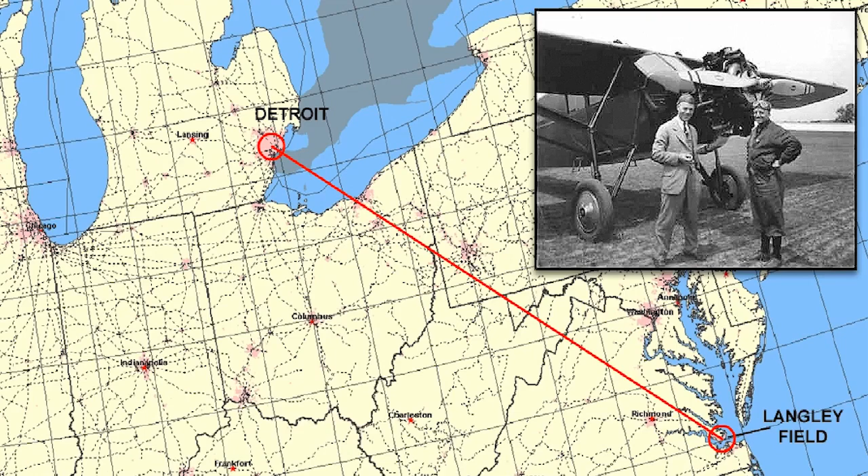The aircraft accomplished the trip at an average speed of 85 miles an hour through adverse weather. The straight line distance is 560 miles, but this aircraft, in fighting its way around and through extremely bad weather, travelled approximately 650 miles.

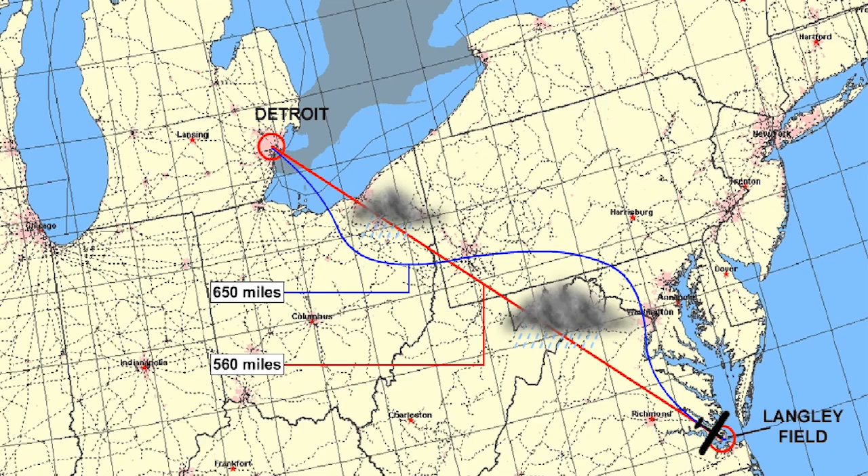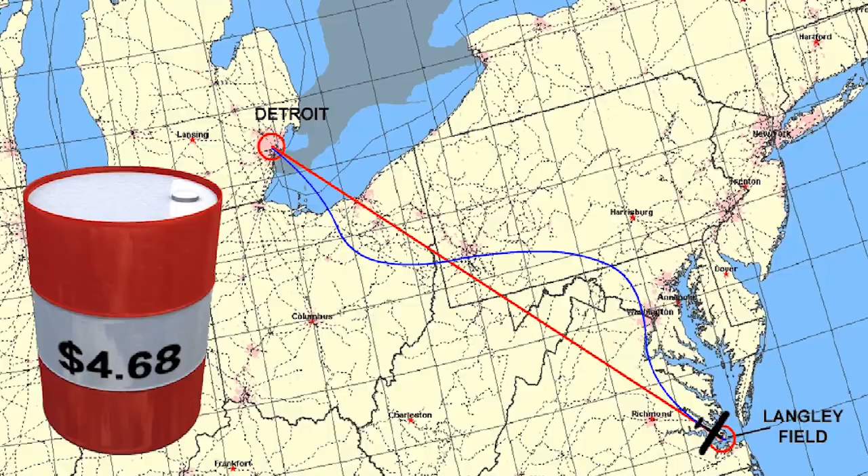The cost of the fuel for the flight in 1929 terms was $4.68. Automotive diesel engines in the past were less powerful than gasoline-fueled aircraft engines, and unfortunately much heavier.

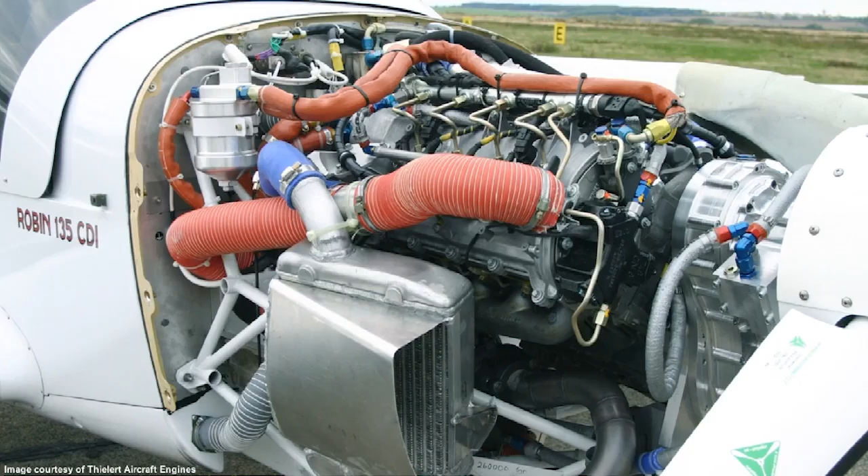Since the 1980s, however, there has been a great evolutionary step forward in the development and production of aviation diesel engines. The common rail principle enables the relationship between the engine's mass and its power to become far more acceptable for aviation usage. As a consequence, due to the adoption of common rail technology and direct fuel injection, and also the use of lighter materials and turbocharger technology, diesel engines offer more advantages to the aviation industry now than they previously could.

Two factors allow aircraft diesel engines to be cheaper to operate. First of all, they use the more widely available kerosene jet, Kerajet fuel, which is substantially less expensive than aviation gasoline, and they use considerably less of it.

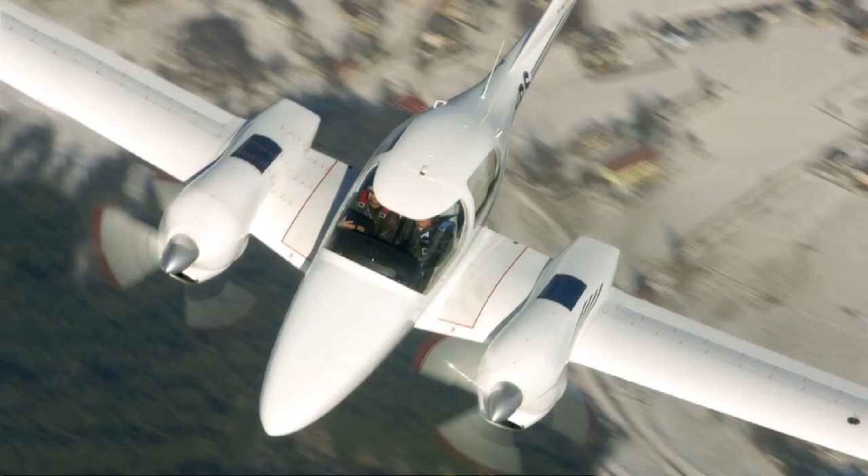A light aircraft powered by two of these diesel engines can carry 4 passengers at speeds up to 231 miles per hour, while consuming only 1 gallon for every 19 miles travelled. If the engines are set to give maximum economy, then 42 miles to each gallon of fuel in still air can be obtained. That's approximately 9¼ miles to each litre of diesel.

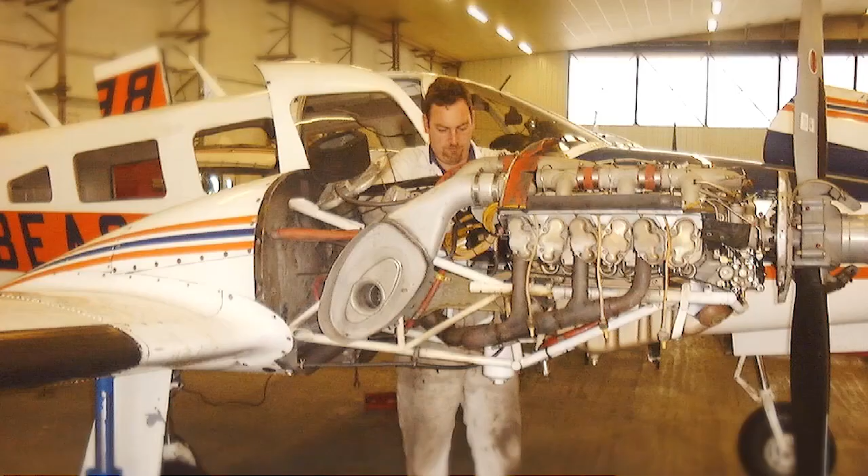This gives diesel-engined aircraft a substantially increased range for a comparable volume of tankage. Secondly, aircraft diesel engines are much more durable than gasoline aircraft engines, so time between overhauls is much greater.

Aircraft diesel engines are also safer than gasoline aircraft engines in operation, because of the reduced fire and explosion risk from using Kerajet fuel, and the fact that they use the compression ignition principle.

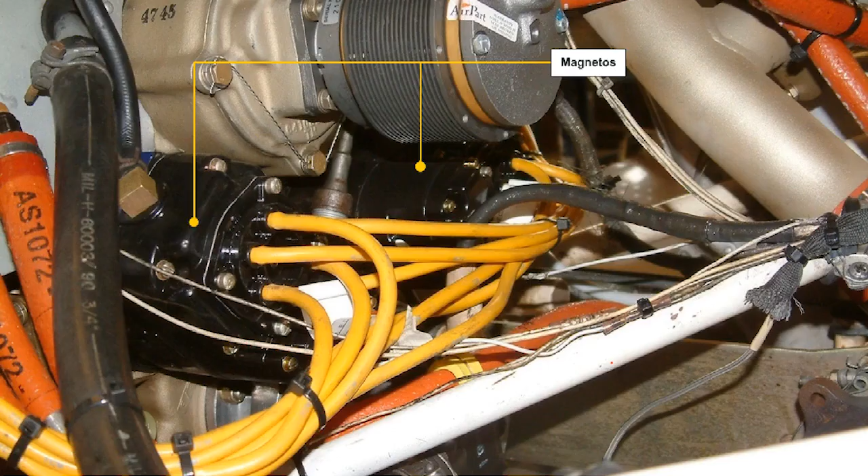An additional advantage put forward by the promoters of the engine used in the Stinson-Detroiter was that it caused negligible radio interference. Of course, this comment was made in the days of fairly primitive airborne radio equipment, and very poor interference suppression. However, the fact that compression ignition is used in the diesel engine is still a great advantage. The complications, which are a consequence of having twin magneto-ignition systems, as are fitted to normal gasoline aircraft engines, are removed.

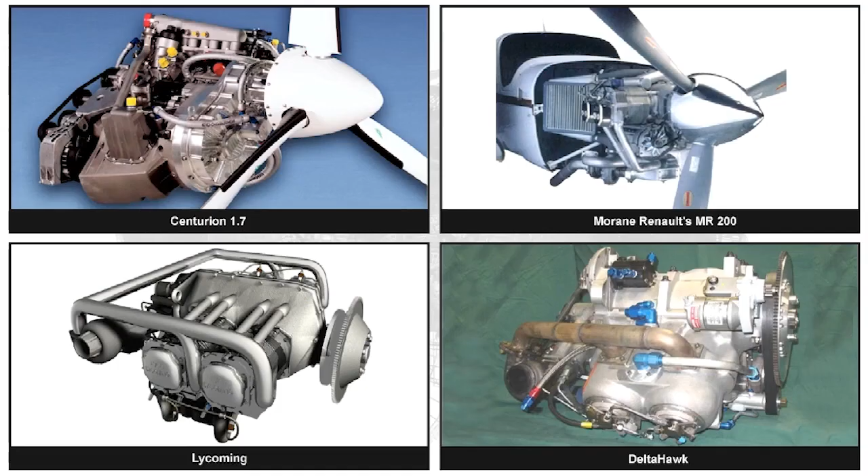There are several different types of aircraft diesel engine presently in production. Amongst these are the Centurion 1.7, shown here, is made by Thielert Aircraft Engines, who are based in Liechtenstein.

They took a 4-cylinder engine, which was first used by Mercedes, and totally re-engineered it for use in aircraft. All of the critical parts of the engine were redesigned by Thielert and are now manufactured by them. It's the first modern diesel engine to be fitted to a certified airframe and scheduled for production.

The manufacturers say that the engine reduces the cost of flying by 70%, compared to gasoline-powered aircraft, based on fuel prices in Germany. Total operating costs for a diesel engine over its lifetime are projected to be an order of magnitude less than that of comparative gasoline-powered engines.

The Centurion 1.7 is a liquid-cooled, turbocharged, 4-cylinder, 4-valve inline engine with common rail fuel injection. It develops 135 horsepower and 302.4 pounds-foot of torque. Displacement is 1.68 litres, and it has a compression ratio of 18:1.

One of the aircraft to which it's fitted is the Diamond Star DA-40 aircraft, manufactured by Diamond Aircraft Industries. Although rated at only 135 horsepower, the Centurion 1.7 can replace more powerful gasoline engines because it provides more static thrust.

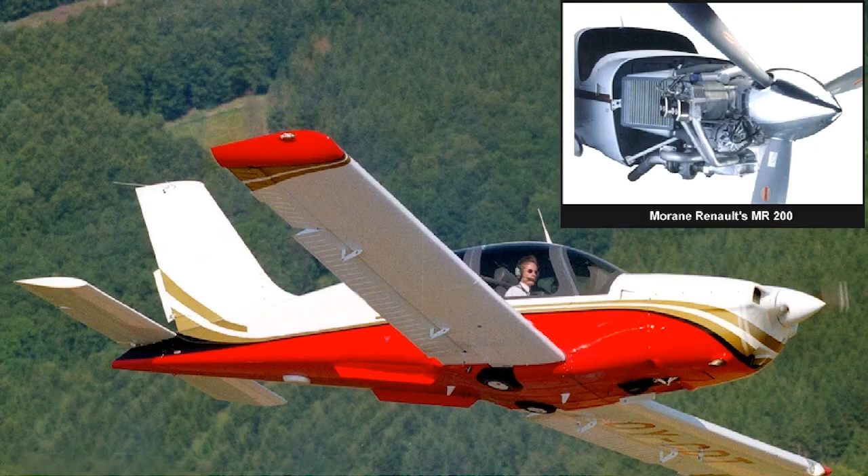The Morane Renault's MR 200 is now certified and flying in production aircraft in Europe. It's already being fitted to a Socata TB20, similar to the one shown here, and is available for installation in several American aircraft types.

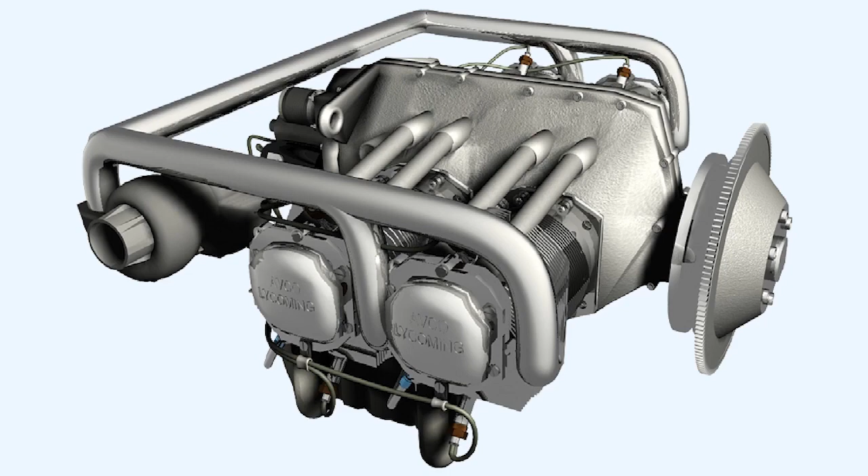Lycoming's 4-cylinder, horizontally opposed, turbocharged, 4-stroke air-cooled diesel engine is rated at 205 horsepower. This engine has been refined from an existing design which was originally developed in Italy and is now owned by Detroit Diesel.

DeltaHawk Incorporated is currently testing a 2-stroke turbo and supercharged, intercooled 4-cylinder, 200 horsepower diesel engine with the cylinders in a 90-degree V configuration. The V-cylinder configuration can be more compact and lighter than opposed configurations.

Basic diesel engine operation is as follows.

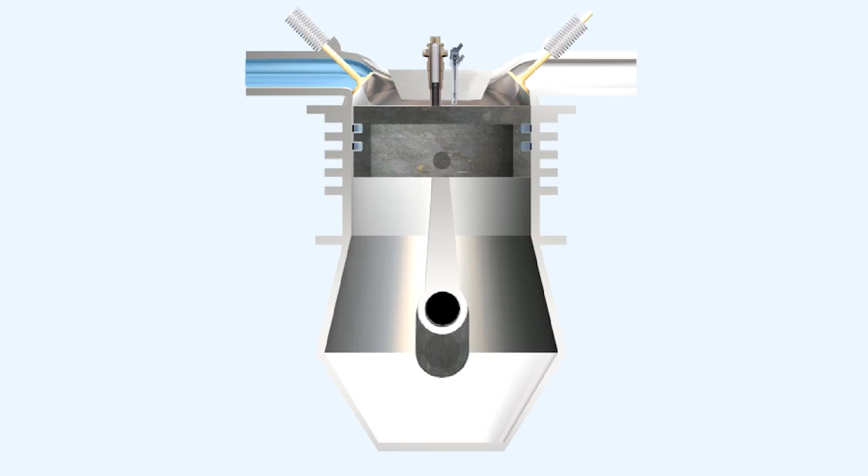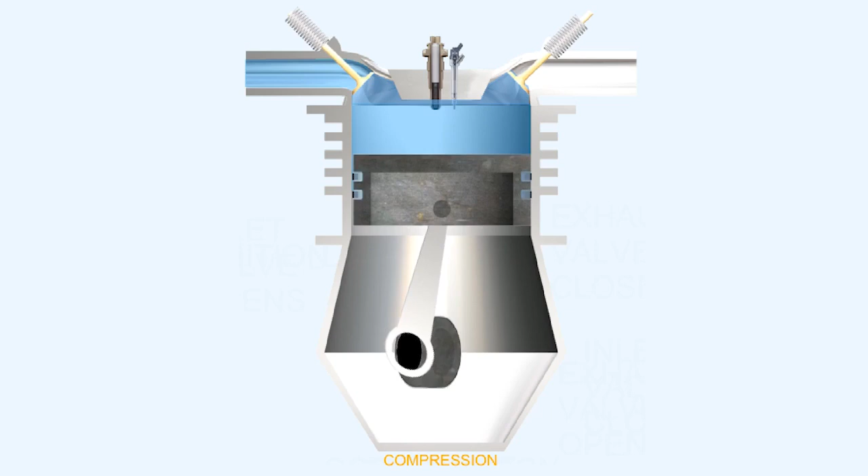Initially, air is introduced into the cylinder as the piston moves down on the induction stroke. The air is now compressed in the combustion chamber as the crankshaft moves to top dead center. No fuel is yet injected.

The compression ratio of the diesel engine is much higher than that of its gasoline equivalent, between 18 or 28 to 1, as opposed to 10 to 1 in high-performance automotive engines. Thus, the extremely high compression causes the air temperature to rise above the flash point of the fuel.

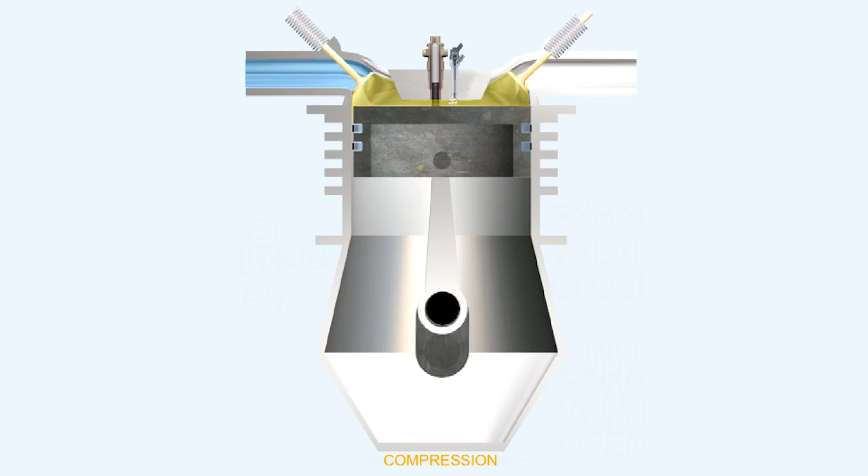When the fuel is then introduced in the combustion chamber, it mixes with the highly compressed and very hot air and combusts spontaneously. The pressure generated by the expansion of the gases as the mixture burns pushes the piston down. The connecting rod transfers the linear energy thus induced to the crankshaft, which translates it into rotary energy.

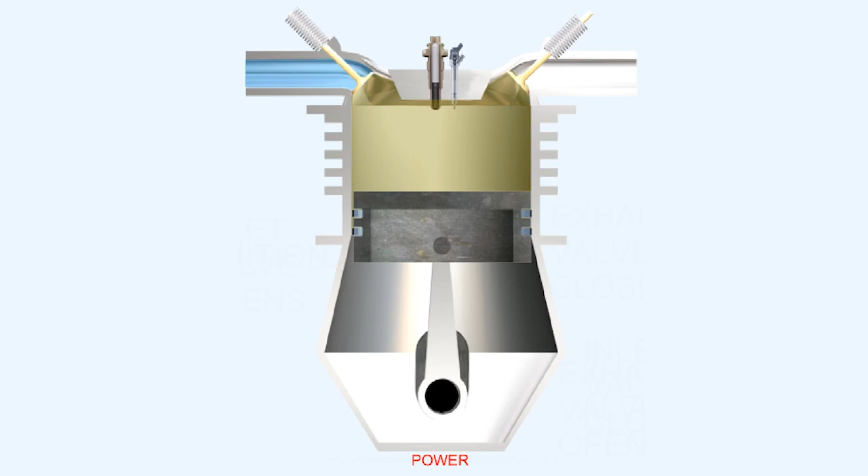Finally, in a similar manner to the gasoline piston engine, the exhaust valve opens and the piston drives the exhaust gas from the cylinder, and the cycle starts again.

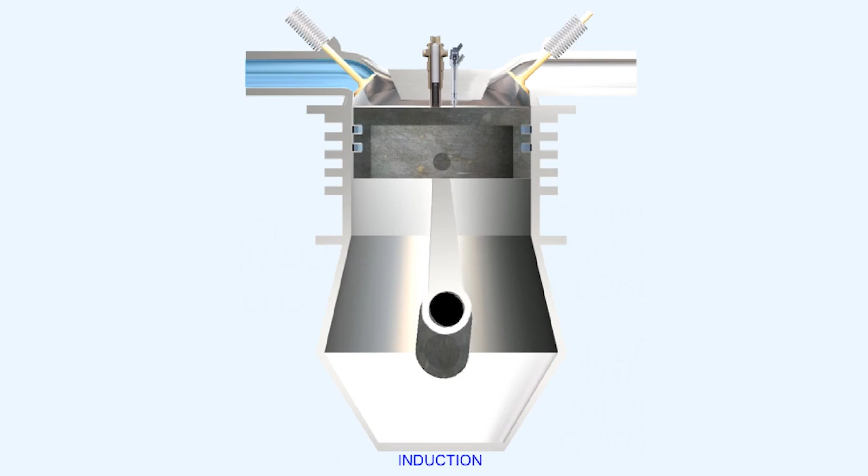In contrast to the gasoline engine, the power output of the diesel engine is actually controlled by the amount of fuel that's introduced into the combustion chamber, while the amount of air remains constant.

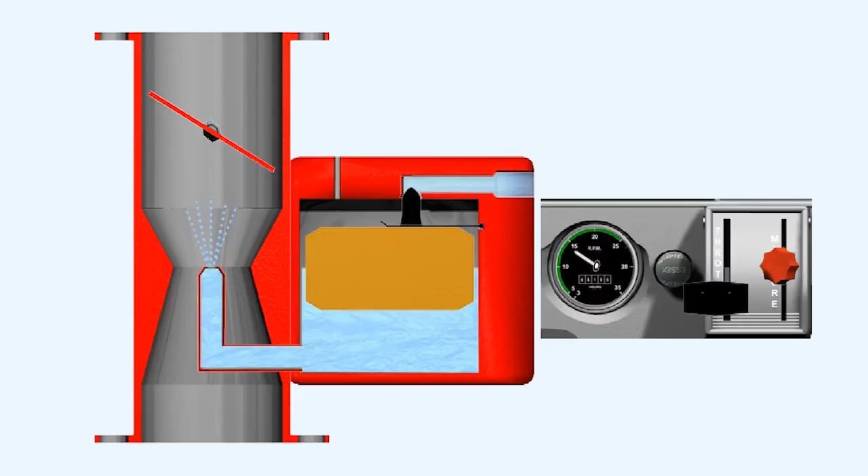In the gasoline engine, both the amount of air and the amount of fuel are changed in response to throttle position, the amount of fuel being further altered by the position of the mixture control lever.

The mixture control lever of the gasoline engine is required to maintain a balance between the amount of fuel and air being allowed into the combustion chamber, in order that a reasonable fuel consumption can be maintained while still keeping the spectre of detonation at bay.

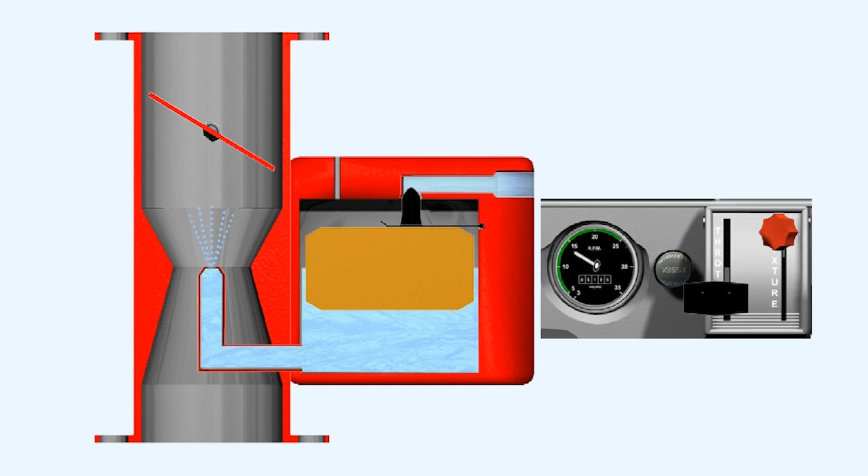Because the fuel is not injected into a diesel engine until the actual required moment of combustion, detonation in this type of engine is not a problem.

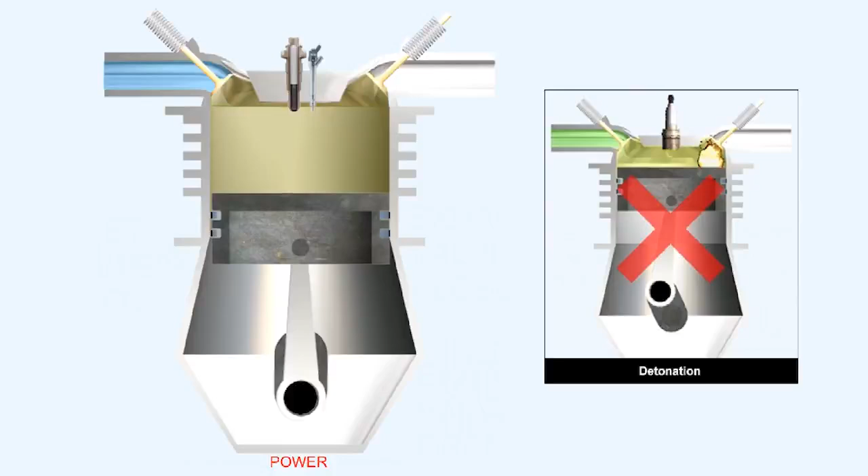Diesel engines do not usually operate at the stoichiometric ratio. The stoichiometric ratio is the air-fuel ratio in an engine where all of the fuel and all of the oxygen is burnt completely.

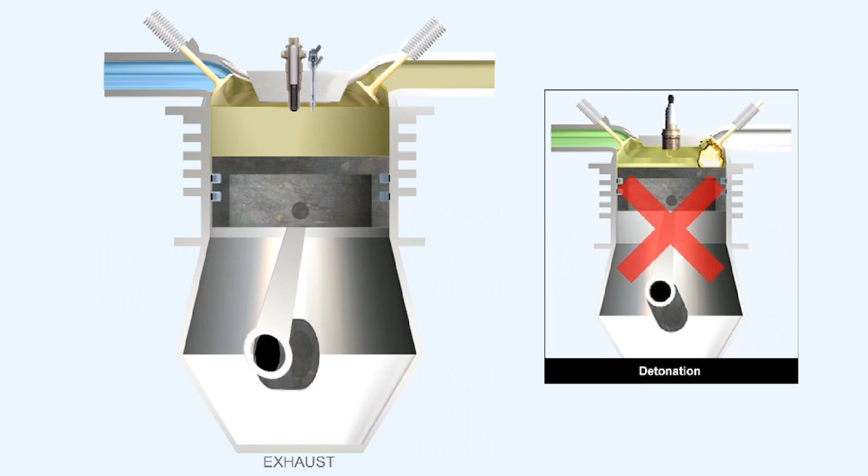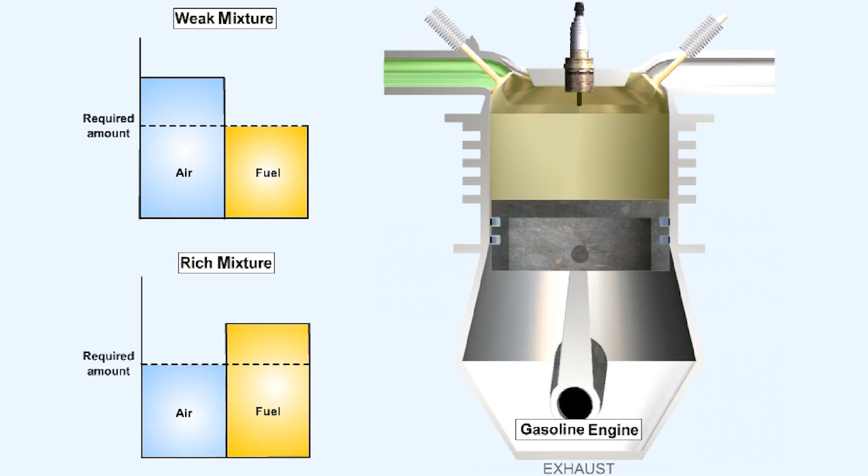If there is more air than is required, a gasoline engine will run weak. If there is more fuel than is required, then the gasoline engine will run rich. Diesel engines always run on a weak mixture, the actual mixture strength depending on the power setting.

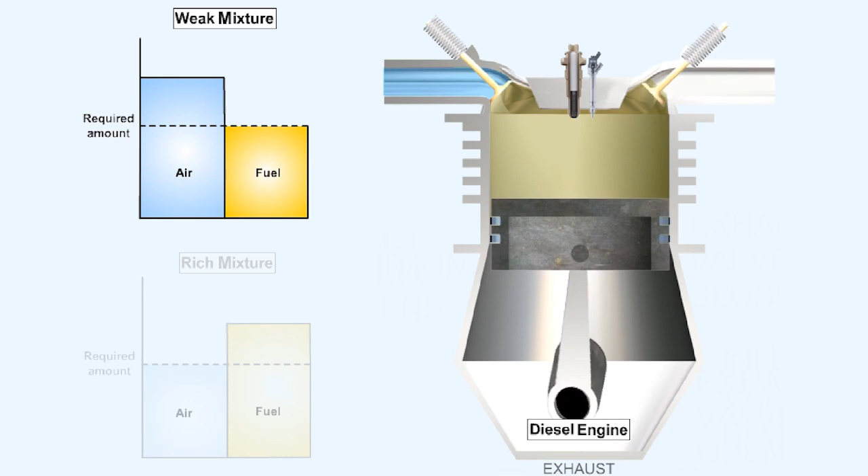In the gasoline engine, airflow into the engine is choked by the throttle valve at all times that the engine is not operating at full throttle, which limits its efficiency. With no throttle valve, the diesel engine's intake is fully open all the time, resulting in a much higher efficiency.

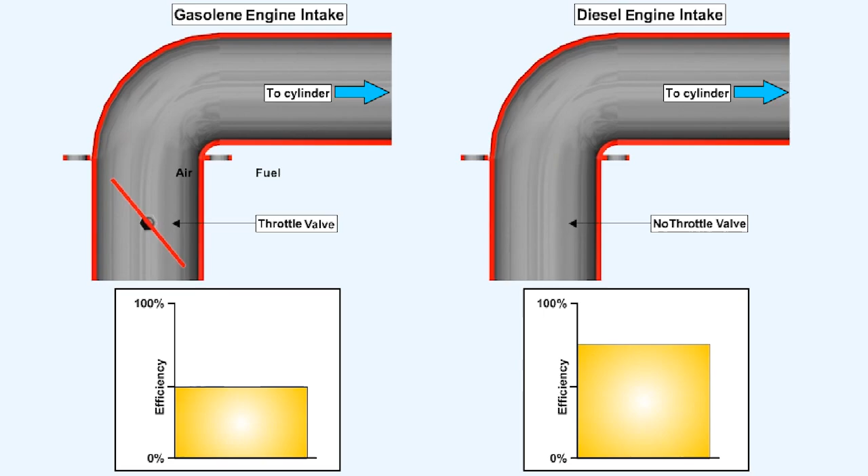Most aircraft diesel engines will use regular kerosene jet fuel, Jet A, which is a light cut of diesel fuel. Jet A is not a very good lubricant, a problem which has to be especially addressed in the fuel pumps used on gas turbine engines.

The fuel pumps used on aircraft diesel engines are no exception. They have to be specially developed for use with Jet A.

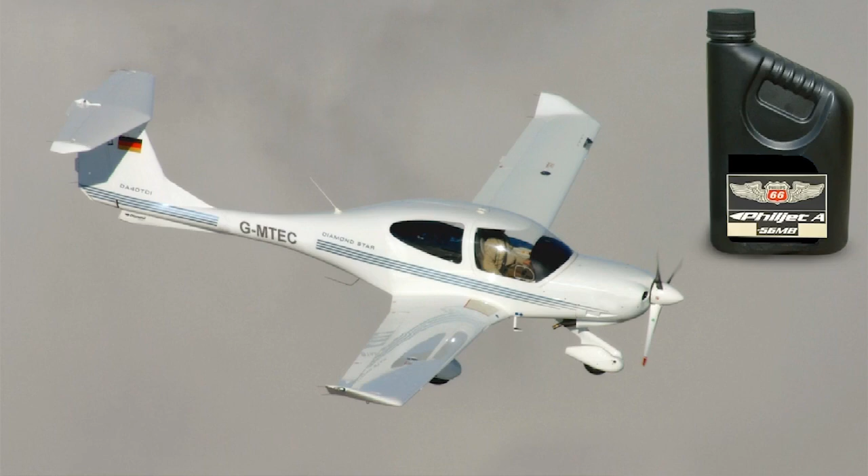Although anti-icing additives are used in Jet A, they may not be included in some of the other fuels which can be used in the aviation diesel engine. There is a question, still unresolved at the time of writing, as to whether or not to allow anti-icing additives to be used in these other fuels.

Anti-icing additives would overcome a tendency which kerosene-like fuels have to absorb more water than does aviation gasoline, but the use of these additives is being curtailed in some countries for environmental reasons.

The ability of the fuel to flow in extremely low temperature conditions must also be ensured, and new requirements regarding cetane number must be specified for kerosene jet fuels, which is currently unspecified.

The cetane number is a measure of the ignition quality of a diesel fuel. It's often mistaken as a measure of fuel quality. The cetane number is actually a measure of a fuel's ignition delay.

This is the time period between the start of injection and start of combustion of the fuel. In a particular diesel engine, higher cetane fuels will have shorter ignition delay periods than lower cetane fuels.

Using the appropriate cetane-rated fuel in a diesel engine is critical to developing the power of that engine.